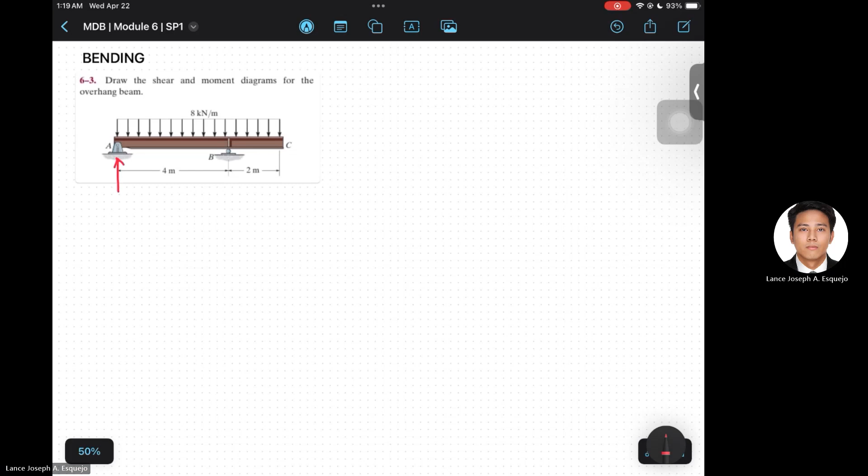First step is to determine the reactions at point A and point B. Since the applied loading is downward, let's assume RA and RB as upward reactions.

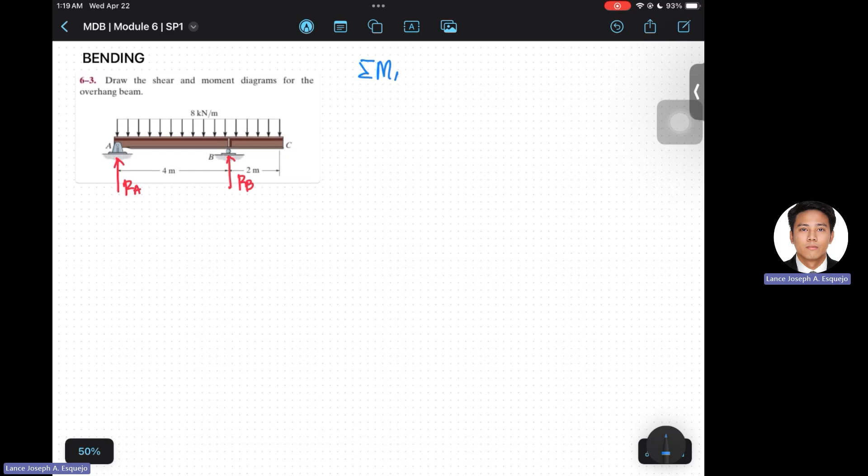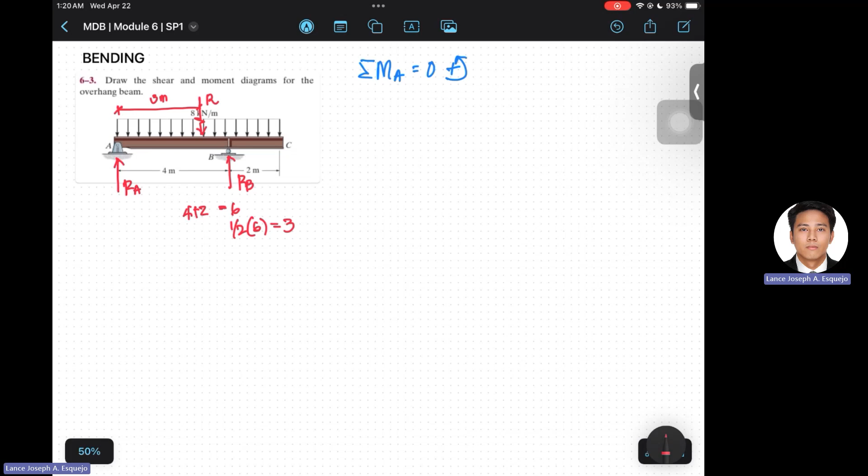Next is to take a summation of moment either at A or at B. Let's say summation of moment at A equals 0, positive counterclockwise. We have the resultant of the uniformly distributed load, let's call it R. Since this is a uniformly distributed load, the location of the resultant is half of the base, that is 4 plus 2, which is 6, then half of it equals 3. So this is 3 meters from the left and 3 meters also from the right.

Going back to our summation of moments about point A: we have the resultant multiplied by the distance 3 meters, rotation is clockwise so negative. Then we have the reaction at point B multiplied by the distance 4 meters, rotation is counterclockwise so positive, equal to 0. For the resultant, we have the area of the uniformly distributed load, that is 8 times 4 plus 2, or 6. Solving for the reaction at B, RB, this is equal to 36 kilonewtons upward.

Next we can use either summation of forces vertical equals 0, positive upward, or summation of moment at point B equals 0, positive counterclockwise. Let's choose summation of moments at B equals 0, positive counterclockwise, to solve for the reaction at A. Then we can use the summation of forces just for checking if our reaction at point A and point B are correct. So for the summation of moments at point B equals 0, positive counterclockwise, we have RA

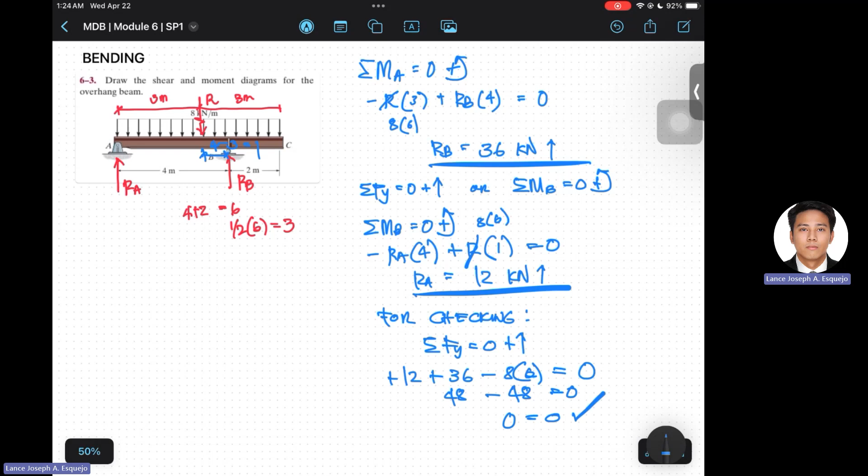So for checking, we have the summation of forces, vertical equals 0, positive upward. We have RA equal to 12, positive, and RB equal to 36, positive. Then we have the resultant R, which is also equal to 8 times 6, and this should equal 0. So 48 minus 48 equals 0, 0 equals 0, so our computed reactions are correct.

Next, let's draw the shear and moment diagram. Let's create a projection for point A, point B, and point C. Here is the shear and the neutral axis. First, starting from 0, we have an upward concentrated load equal to RA, which we know is 12 kilonewtons, so positive 12 here.

Next, we know that the change in shear is equal to the area of the loading diagram. That means the second point V2 minus the first point V1 is equal to the area of the loading diagram. So we want to know the value of V2, the second point. So the second point is equal to the first point or shear at point 1 plus the area of the loading diagram. Let's use that: we have point B as the second point, and that is equal to point A as the first point plus the area of the loading diagram.

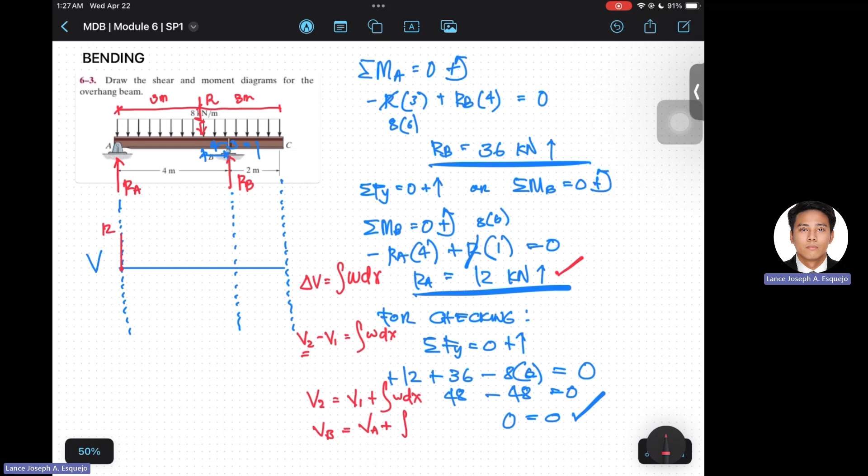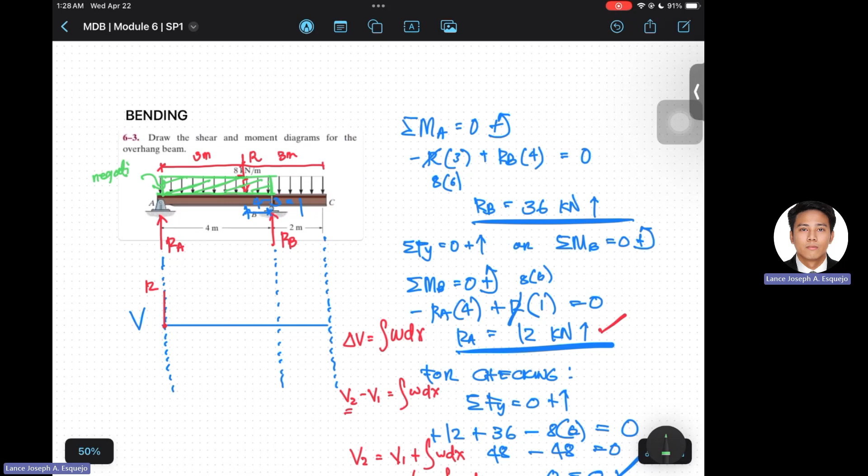So we know VA, that's 12. Going back to the loading diagram, from point A to point B we have this area. Since the load is downward, this area is negative, and then we'll have the negative area, which is equal to the height times the base, which is 4 meters.

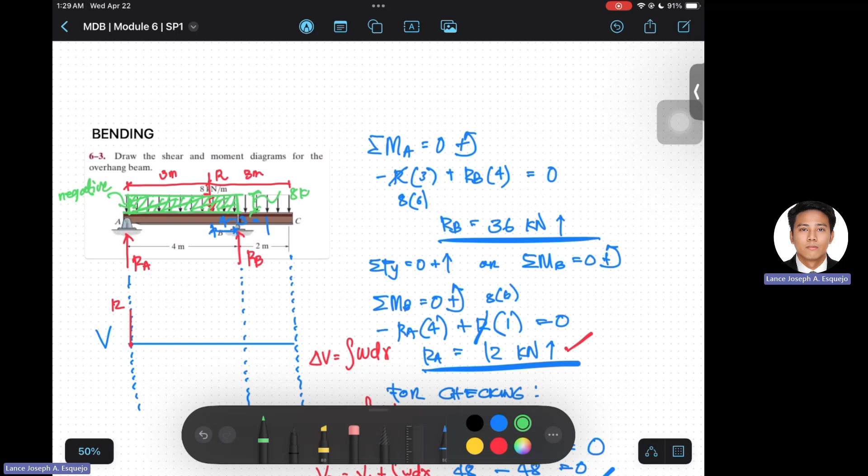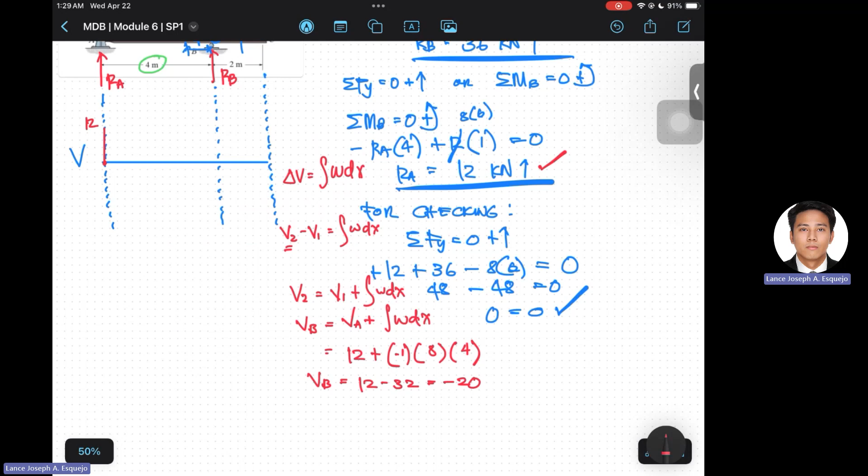So again, this area has a height of 8 kilonewtons per meter, and the base is 4 meters. So now the shear at B is equal to 12 minus 32, that's equal to negative 20. So here we have negative 20.

Since the loading diagram has a constant value from point A to point B, this means that the slope is constant, since we know that the slope of the shear diagram is equal to the loading intensity. So the slope between point A and point B is constant because the loading diagram is constant, and the slope is negative 8. So here, connecting point A and point B as a straight line, this is a first degree function, with positive area here and negative area here.

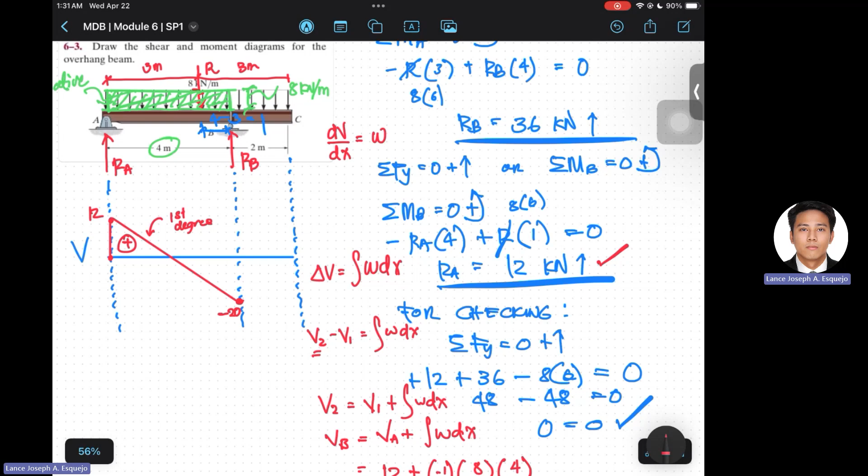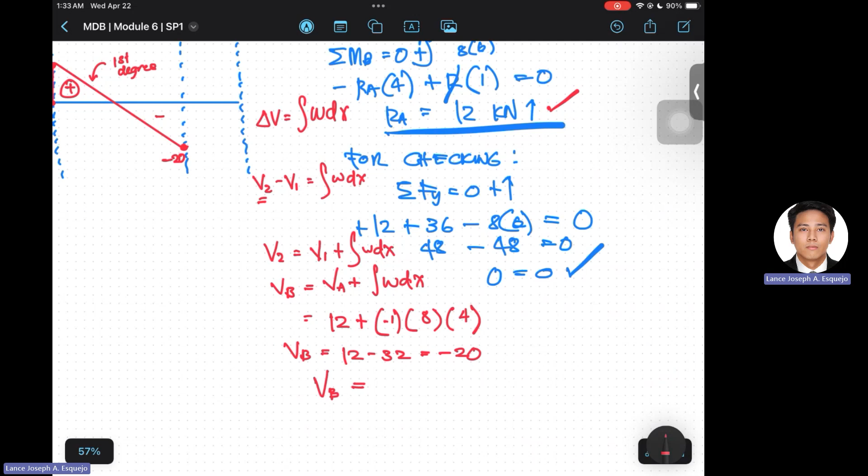Lastly, at point B we have a concentrated load equal to 36 kilonewtons upward. So we have VB that is equal to negative 20 plus the upward concentrated load, 36 kilonewtons, then we'll have positive 16. So from negative 20, we jump to positive 16.

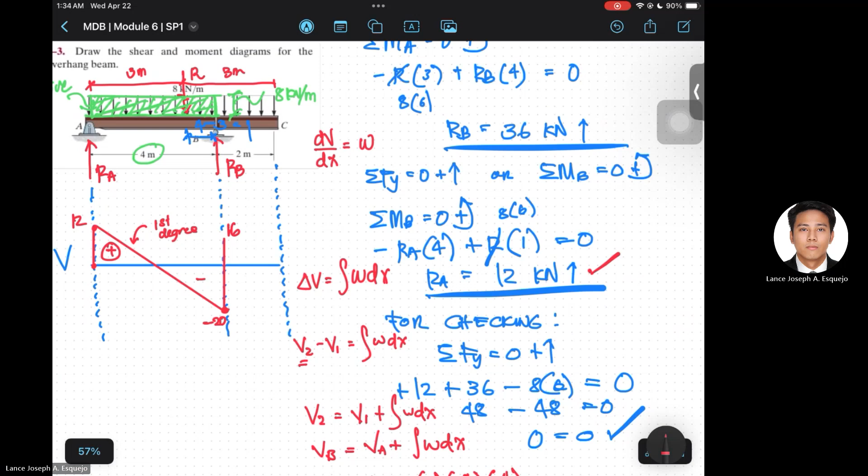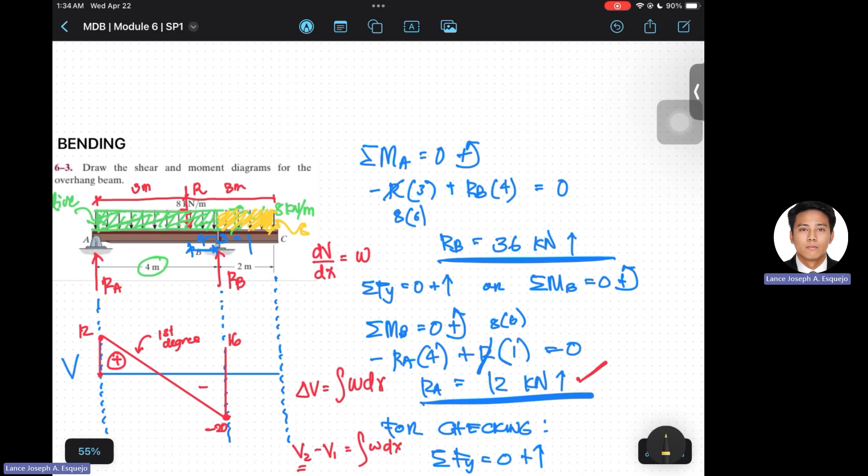And lastly, we have the shear at C that is equal to shear at B plus the area of the loading diagram. We know the shear at B, that's 16, plus the loading diagram here. This is the area, we have the height 8 kilonewtons per meter and the base 2, and since downward, that's a negative area, so 8 height, base 2. We'll end up with the value of shear at point C that is equal to 0.

So our shear diagram closes, from 16 to 0. Since again the slope of the shear diagram is equal to the loading intensity, which is constant, therefore the curvature here is a straight line that is also a first degree function, and this one is positive area.

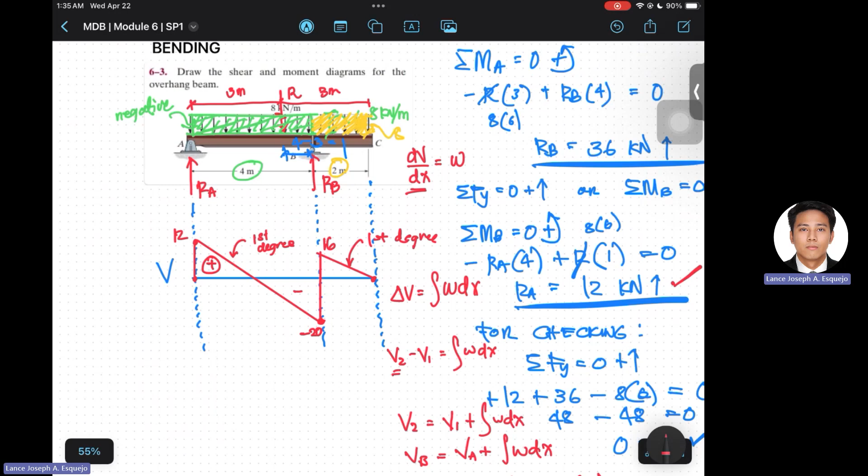So we're done with the shear diagram. Next is the moment diagram. Let's project point A, point B, and point C. This is M, the neutral axis. And then let's project also the location of zero shear, which will also be our location for the maximum moment.

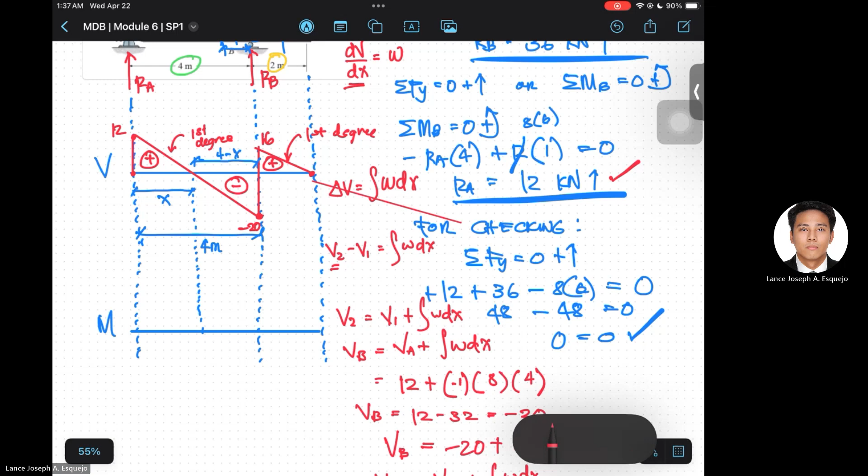Next is to determine this value. Let's call it X. We know the total is 4 meters, therefore this one is 4 minus X. So by ratio and proportion, we can now determine the value of X.

So we have this triangle. The height is 12, the base is X. And this should be equal to 20 divided by 4 minus X. Again, we use ratio and proportion since we have two similar triangles: the first one is this one, and the second one is this one. Solving for X, we get X equals 1.5 meters.

Now that we know the value of X, we can determine this area. Let's start at the moment diagram. From point A, we have 0 moment, and then to this point, let's call it point D. So we have delta M, or the change in moment, that is equal to the area of the shear diagram.

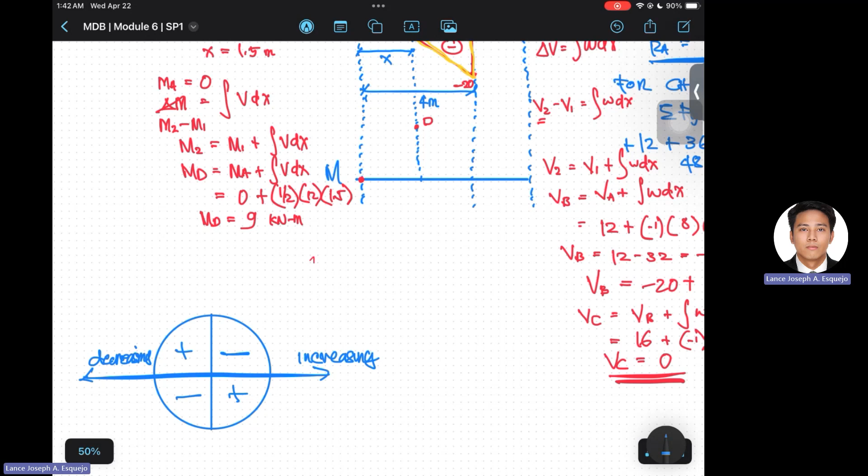For point A to point D, we have a positive area. So this one's a positive area. Going back to our graph, point A to point D is a positive area, so what's applicable to us is these two.

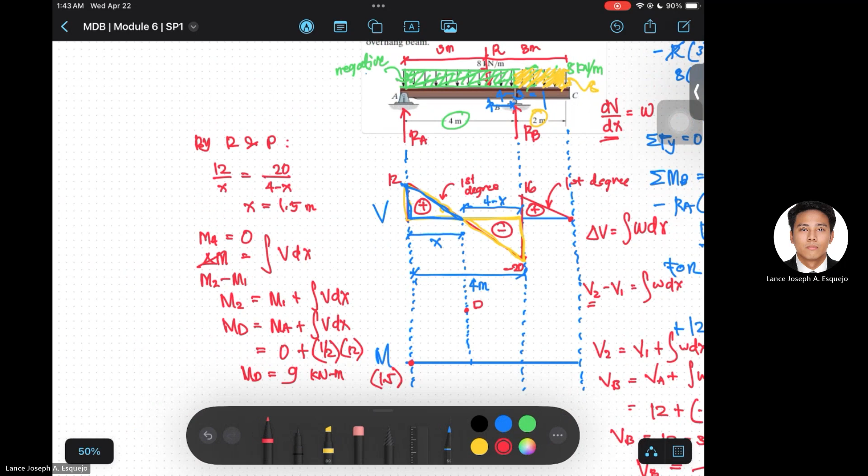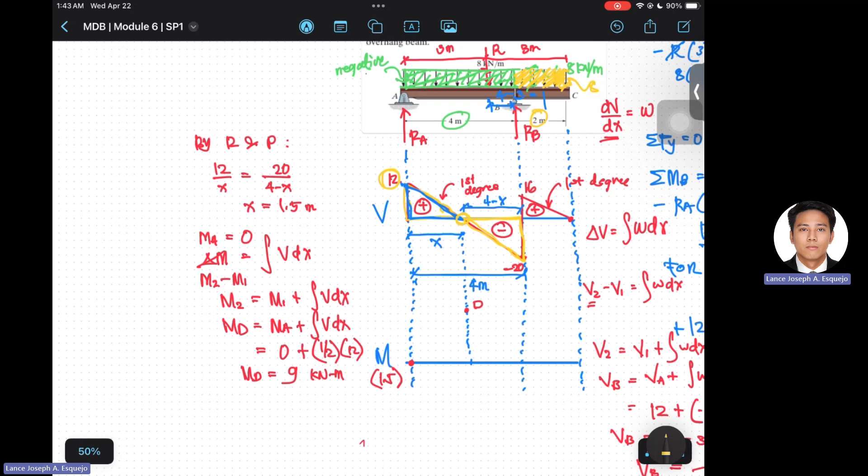Now, what about decreasing and increasing? Let's focus on the numerical value. At point A, we have a numerical value equal to 12, and at point D, we have a numerical value equal to 0. So that is decreasing. This means the applicable curvature is this one: a positive area with the numerical value decreasing from 12 to 0, so our curvature will be this one.

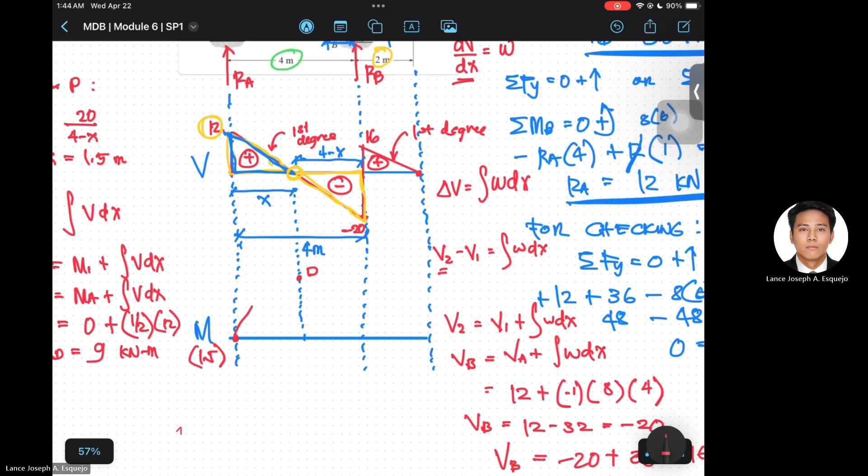How do we apply this to the shear and moment diagram? From point A to point D, we'll have this curvature. Next, for point D to point B, we have a negative area, and the numerical value of the shear from point D to point B goes from 0 here to 20 here.

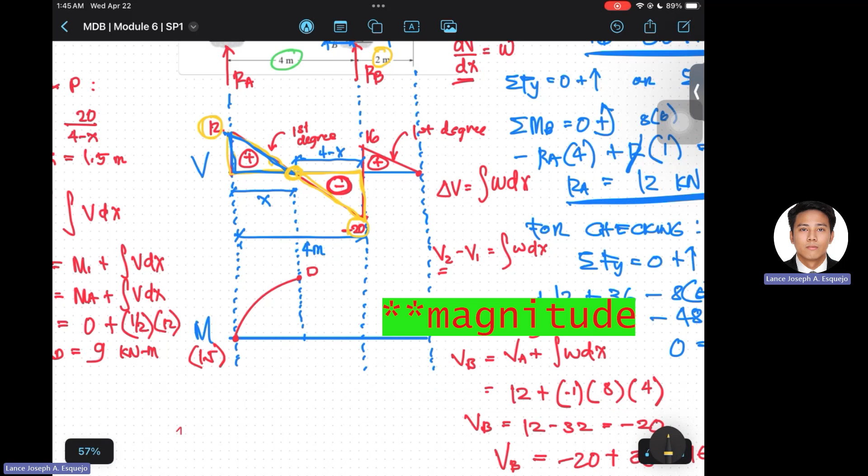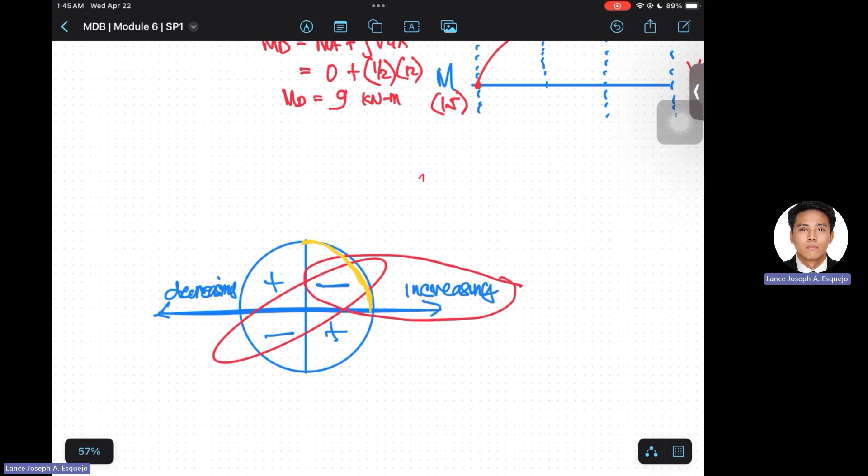So it's increasing. Negative area and increasing numerical value. Using this guide again, negative area and increasing numerical value means the applicable curvature is this one. Going back to the moment diagram, we know that the curvature is this one.

So what's the numerical value of the moment at B now? On the left side of B, we have moment at B equal to moment at D plus the area of the shear diagram. We know the moment at D is 9, and the area of the shear diagram is 1/2 times negative 20, with our base being 4 minus x, that is 1.5. Then we end up with moment at B equal to negative 16 kilonewton meters, so negative 16 is somewhere here.

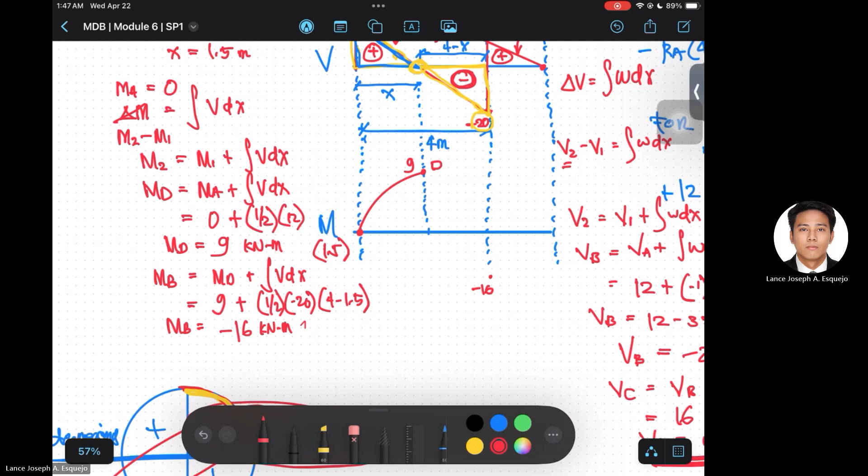Then this is 9, and the curvature similar to this. So from point D to point B, we'll have this curvature. And then lastly, moment at C is equal to moment at B plus the area of the shear diagram.

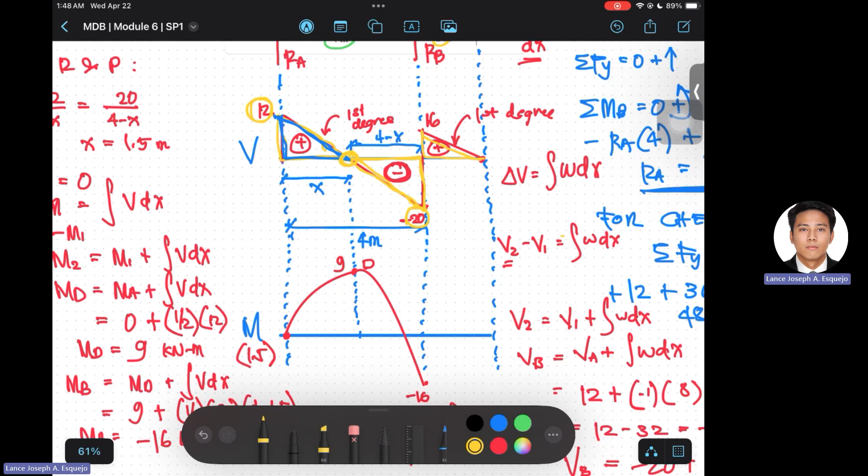Moment at B, we have negative 16. And then the area of the shear diagram, this one right here, is a positive area with height 16 and base 2 meters. So height is 16, 1/2 times 16, and base is 2 meters. We end up with moment at C equal to 0.

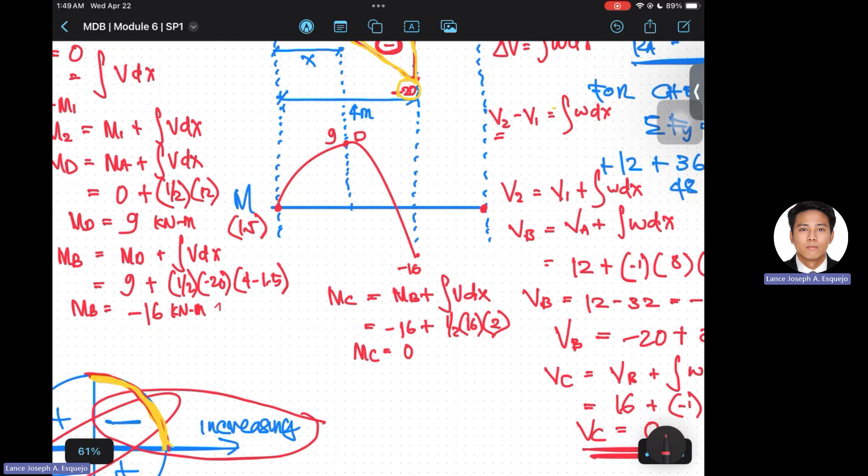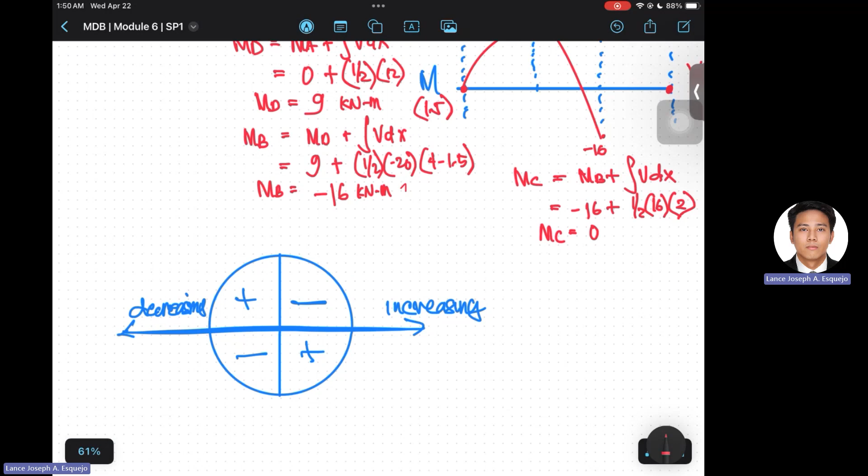So as expected, our moment at the end of the beam is 0 since we don't have a moment reaction at that end. So how about the curvature again? Let's go back to our guide. We know we have a positive area between point B and point C.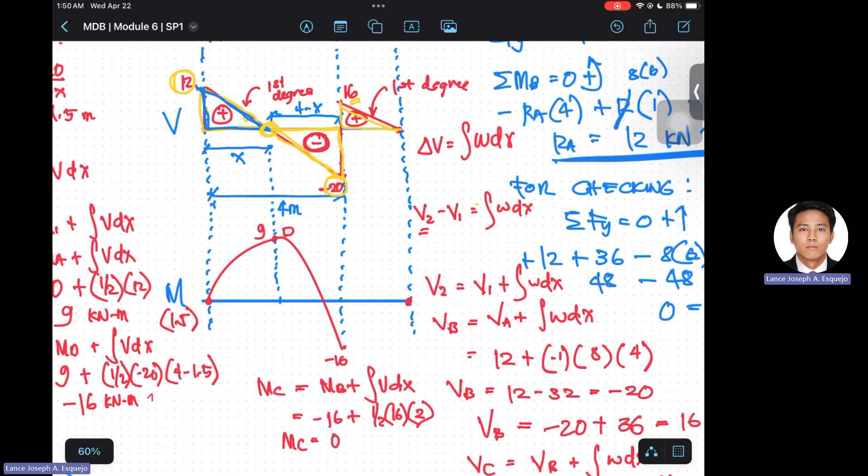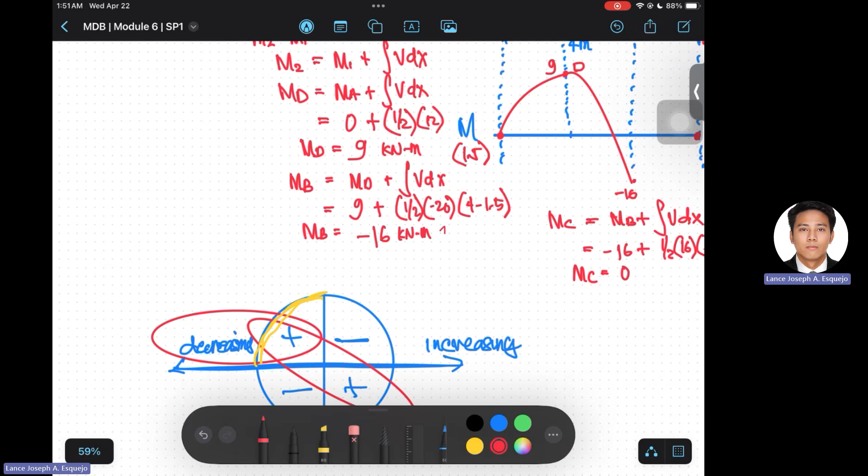And then the numerical value is from 16 to 0, so we have a decreasing numerical value. Therefore, what's applicable to us is this one, and the curvature is this one. Going back to the moment diagram, we have this curvature.

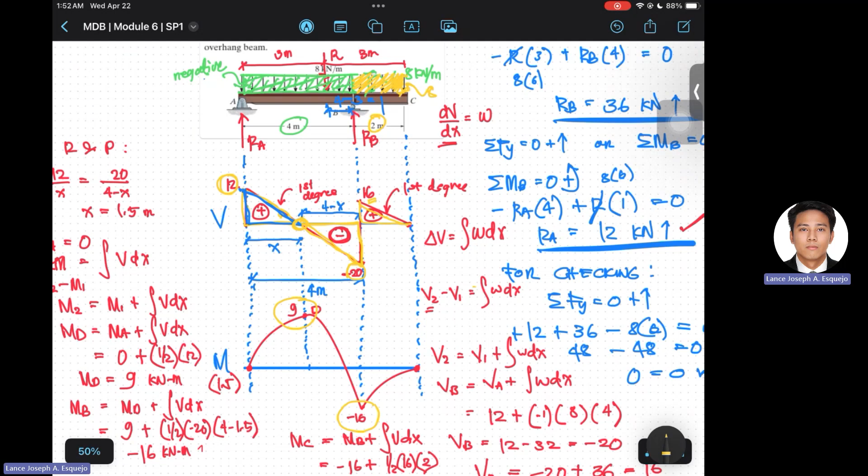And this right here is the shear and moment diagram for the given problem. Finally, the 9 kilonewton meters is the maximum positive moment, and the negative 16 kilonewton meters is the maximum negative moment, with the absolute maximum moment being 16 kilonewton meters. Maximum positive shear is 16 kilonewtons, maximum negative shear is negative 20 kilonewtons, and the absolute maximum shear is 20 kilonewtons.